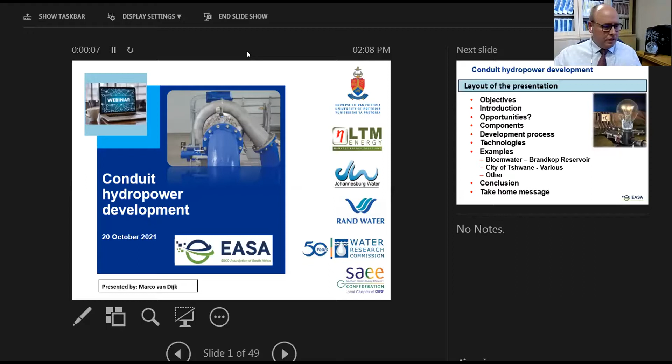So I'm going to share my screen. That one. I think I then need to just swap this around. So hopefully you can see the screen now in presentation mode. Is that right, Kulakani? Yes, we can. Oh, great stuff. Let me just move this camera, I think it should be over here somewhere.

So the title of today's presentation is on Conduit hydropower and the development of that, and we've got a number of panelists supporting this. I am based at the University of Pretoria as well as at LTM Energy, heading the hydropower section there.

So what I'll do is firstly give you a bit of an introduction of what we can expect in this presentation of mine. It's probably going to be about 30 to 40 minutes in length, and then there's some opportunities for questions, and obviously through the panelists as well. I'll first start off with the objectives of this specific topic, give you a bit of an introduction, some opportunities, just highlight those, then look at the different components.

That's where the theoretical academic component comes in. We'll look at the development process, the technologies that are out there that could be utilized, then touch on some examples - I've only selected a few. We now have many more that could be discussed, but that would be a day-long webinar, not just an hour and a half. And then some other examples as well. We'll end off with the conclusion and then a take-home message that I've got for you on this.

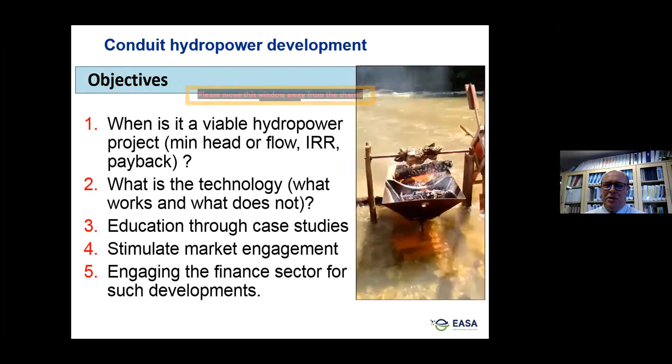Just a small video clip showing one way of utilizing the flow of water - this is a kinetic hydropower installation and its use. For these people, this is definitely a viable hydropower project - they're getting the meat cooked using the power of water.

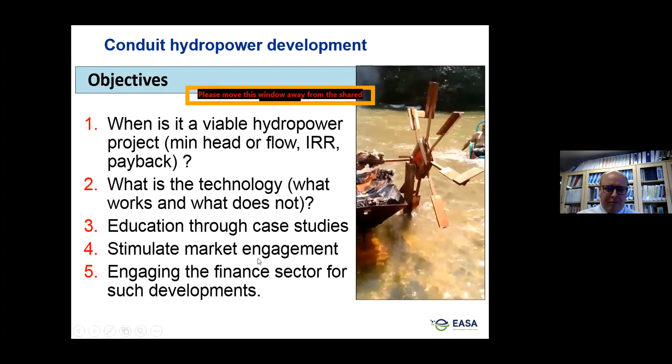In South Africa, we are the country with the second largest installed hydropower capacity in Africa, but we produce less than 5% of our total electricity from hydropower. We've got some large pump storage schemes, so that pushes up this hydropower capacity, but we actually don't generate a lot of our electricity from hydropower.

We don't have as many conventional hydropower opportunities as the rest of Africa, simply because we're a water scarce country. But we do transfer large quantities of water daily under pressurized or gravity conditions over large distances and elevations, done in canals, pipelines, tunnels, and so on. So there are opportunities at existing water infrastructure, and we call these the so-called unconventional opportunities.

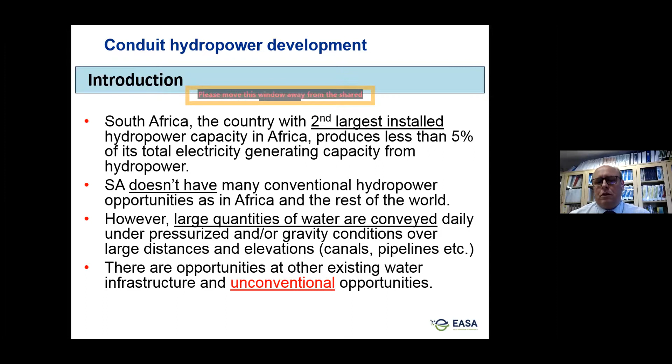To generate hydropower, we need head, flow, and then the third thing is we actually need a use for the generated electricity. Here's a video clip showing the typical installation that's required.

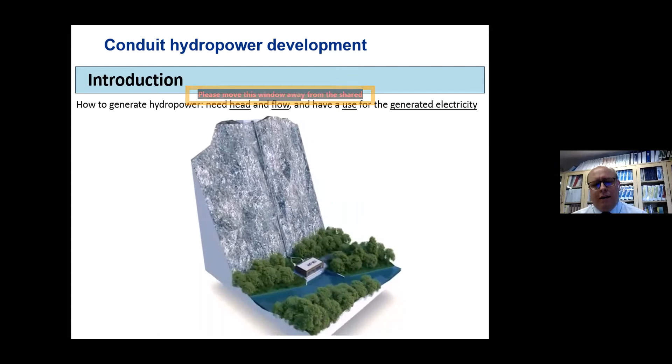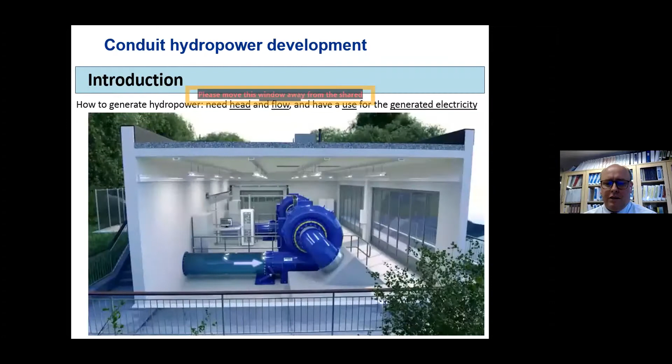It starts off with having an upper reservoir. From the upper reservoir, water is fed through a penstock down to a turbine room. Where it enters the turbine room, we open a valve, which allows the water to flow into a turbine. Once it flows into this turbine, we open the wicket gates, which controls the flow.

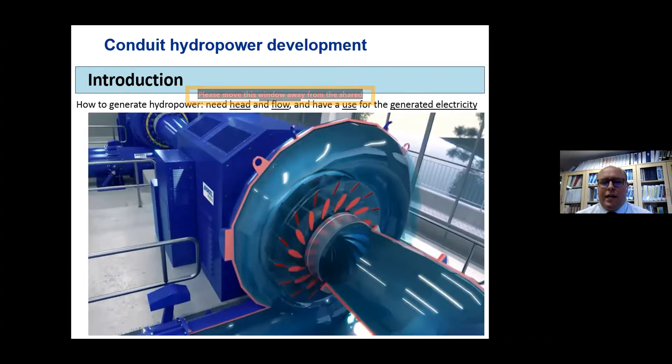The flow is guided onto a runner - it's called a runner in a turbine, not an impeller. That runner is connected to an axle. The axle turns a generator, and the generator converts the mechanical energy into electricity.

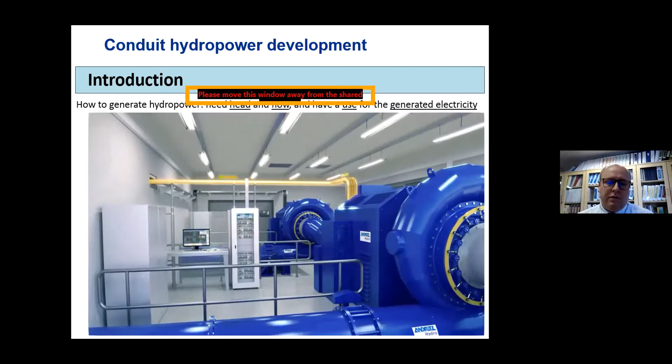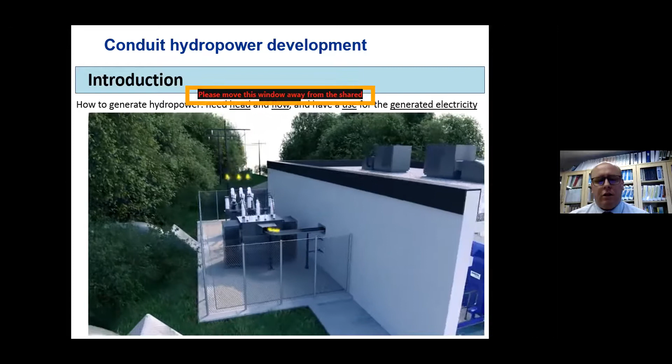That electricity goes through a control panel, and eventually is fed back into, or fed into the grid, or it's just used on site if there's an application for that. The water that has gone through the turbine is then fed through a so-called tail race into the downstream reservoir. So this is the basic principle of hydropower.

So you saw the head difference between the upper and the lower reservoir. You saw that there was flow between the upper and the lower reservoir, and then there's a need for electricity - it's taken somewhere, either on site for smaller installations, or it's fed into the grid.

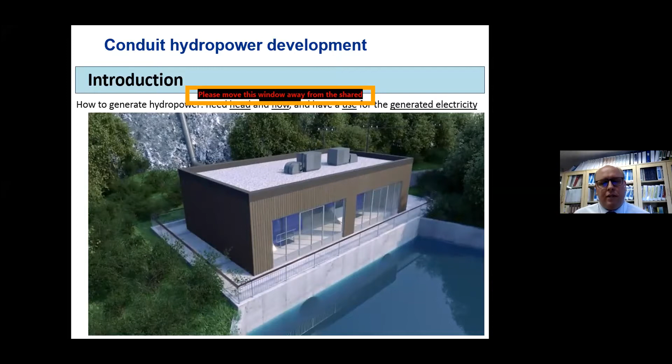So why hydropower? We all know about the electricity shortages we've got, and just last week we had some good examples of that again. We all know about the rising cost of electricity, which is making all of these renewables even more affordable. And the whole awareness and concerns we have with the environment creates a drive to the renewables and greener type of technologies.

We have a need to utilize all our available resources, and especially if it's a renewable resource that I'm sharing with you today, that actually proves that it can be a viable alternative in a number of cases.

The classification we've got for hydropower in South Africa is: pico when it's less than 20 kilowatts, micro if it's between 20 and 100 kilowatts, mini 100 kilowatt to 1,000 kilowatt, and small is 1 megawatt to 10 megawatt. After that it becomes large, so the ones at Gariep Dam and Vanderkloof Dam that Eskom has, and Mbashe, are classified as large.

So our focus here is on the whole spectrum from pico to small that could be evaluated for conduit hydropower.

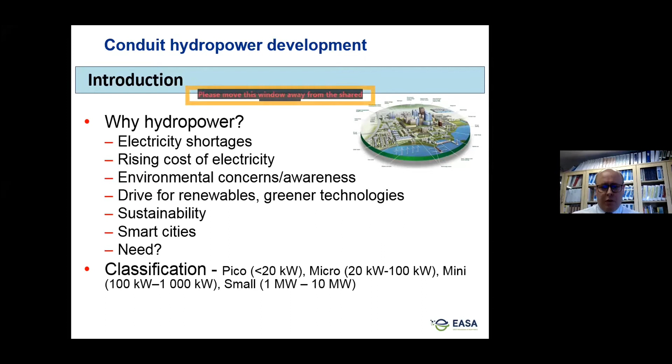So we see these as some low-hanging fruit. And why we see it as low-hanging fruit is some of that infrastructure is already there. You don't need to build a new dam or construct a new penstock. It's already there, and all you need to do is latch onto that and add this subsequent benefit that you can actually get from the system by adding on a turbine.

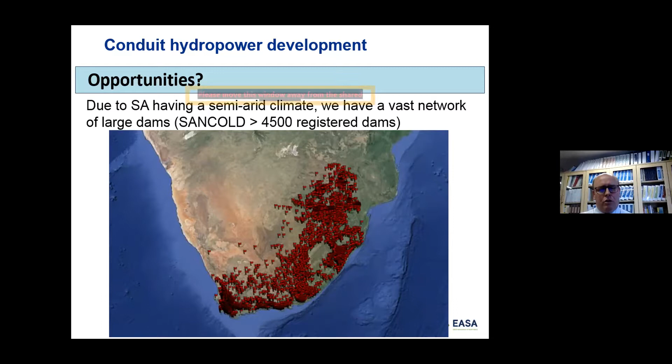Why not just have a turbine on that release? So we're not saying let all the water go from the Vaal Dam, we need it for obviously Gauteng. But if you have to release the water anyway for the downstream river system, why not just add your turbine to that? So that will be more the conventional one.

So we're focusing today on this presentation on the more unconventional ones. In South Africa, we've got numerous municipalities, district and local. We have the Department of Water and Sanitation, Eskom, irrigation schemes, mining, and all of these entities have opportunities to add a hydropower plant to some of their pipelines, to the wastewater treatment works, to the water treatment works. And it is just a case where one needs to find that location where you've got the head and the flow, and see whether or not you can add a turbine instead of dissipating some of that energy with a valve.

Why not just add a turbine to it and convert it to a renewable energy source? So just 3 examples in the city of Tshwane. There's many more examples in the city of Tshwane, but I just highlighted just 3 here, where we've got at 3 reservoirs, Heights, Garsfontein, and Klapperkop. We can generate...

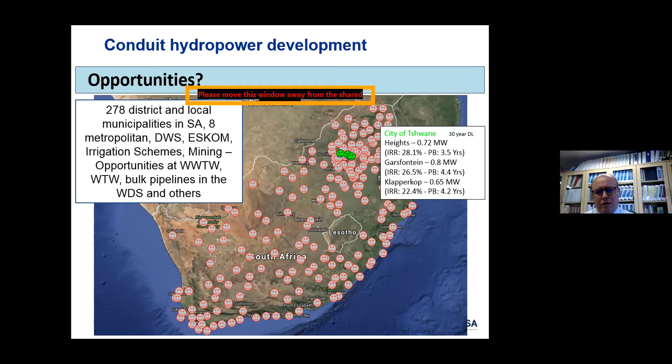Small micro installations, or mini installations sorry, with high internal rate of returns and quick payback periods, and the levelized cost of this electricity being probably less than half or probably a third of what the current levelized cost is of coal generated electricity. So it makes sense to develop these, and the city of Tshwane has gone and developed some of these, which I'll share with you.

So as I mentioned, what's needed, the components, is you need a head difference and you need flow. The head will depend on the pipe length and the diameter, and where's your intake, where's the outlet, where's the powerhouse. So this will be the picture you see there, of a more conventional one where you might have had a water wheel situated next to it and they utilize this height difference there. So in our pipe systems, we look a little bit differently at it. We don't have this open flow of water, we have it in a sort of confined, closed conduit. And that's why we refer to it as conduit hydropower.

So that's the one component, the head difference. The second component is the flow, and that could be variable as well, depending on - in most cases we look at it in the hydrology sense. Does it rain enough? What does the catchment look like? What is the storage? But in conduit hydropower, we don't look at the rainfall, it's not important for us. We're looking at what's flowing in the pipeline already. So there we look at demand patterns, we look more at the hydraulic side of things. What's the reservoir capacity? What's the system layout? And there's the formula, I'll get back to that now again: power equals rho G Q H, multiplied by the efficiency.

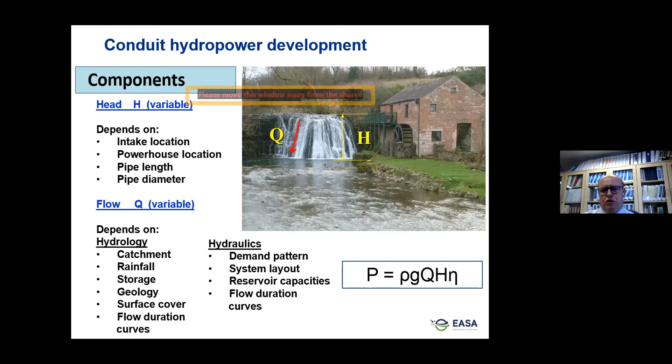So I'll show it in an example for you in a second or so. Conduit hydropower is similar to what I showed you in the video, where you have the upper reservoir and the lower reservoir. Conduit hydropower is from one storage reservoir to another storage reservoir. So these concrete structures you see in town, we have water flowing under gravity from reservoir number 1 to reservoir number 2. And the way we control flow in that pipe system is by choking it. We choke it through a so-called PRS, which is referred to as a pressure reducing station. And in that pressure reducing station, we have pressure reducing valves.

Every one of you also have a pressure reducing valve at your house. It's where the water goes into your geyser, and we have the same type of valve there where we choke the flow and control the pressure going into your geyser to only be 4 bar, or 400 kPa, or 40 meters of pressure. The same then happens in our water distribution bulk water supply lines, where we have to control that water going into the end reservoir and control the flow.

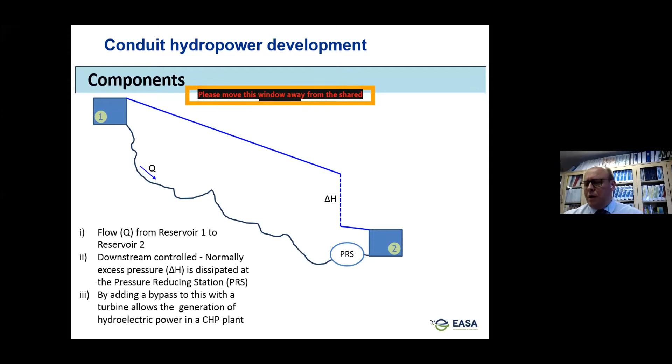So this pressure reducing valve basically chokes the flow, and it's a mechanical device. But why would you want to throw away this pressure in the system if you could rather add a turbine and force that water to go through it? If it goes to the turbine, it will start turning the runner. The runner turns the axle and starts generating electricity through the generator. You get rid of that same amount of pressure you wanted to get rid of, but now you force it through the turbine.

So it's a very nice retrofit to existing systems where we have the pipeline and the pressure reducing station, and we now have the turbine in parallel to that. You would rather force the water to go through the turbine instead of the valves. You would always still need the valves, because there might be a case where you want to service the turbine and still need to supply water. Remember, this is a subsequent benefit we're getting from the pipeline, and the main function is still to supply water.

Very importantly, this operates 24 hours a day, 7 days a week, or 360 days a year. I say 360 because you might have a few days of maintenance on the pipeline where you're not going to be able to supply. What I'd like to highlight is that you have a very continuous base load of electricity that can be generated here, not just in daylight hours or when the wind is blowing. We have a very constant, very predictable type of electricity generation that we can get from this.

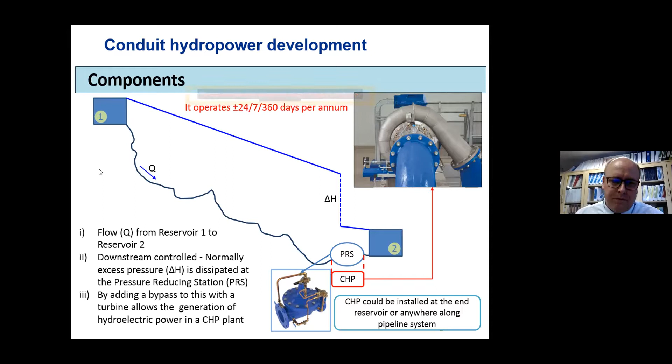So the development process would be: identify the site, that's the first step. Determine the generation potential based on the flow and head available. Consider site layouts and configurations that could work on that specific site. Consider the turbine options, and I'll show you some turbine options that can be considered. Then there's the application, or what you're going to do with the electricity. Are you going to put it back into the grid, utilize it on site, or use it as a mini grid standalone type of application?

And then we also look at the economics of this. So there's a process, a scope of work you go through to eventually develop a site. But the most important three elements are flow, head, and a use for the electricity. The rest is just technical information on how you're going to do it, but you need those different elements.

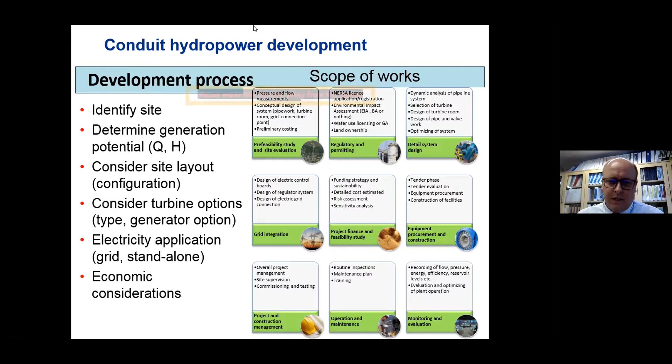So, back to the formula. The formula says rho G Q H, multiplied by the efficiency. A very simple formula, very similar to a pump, but in a pump it's the electricity needed to drive it, so you divide by efficiency. Here we multiply by efficiency. The density of the fluid, in most cases water, is 1,000. Gravitational acceleration is pretty fixed in South Africa at 9.81, so you can use that. The flow would be in cubic meters per second.

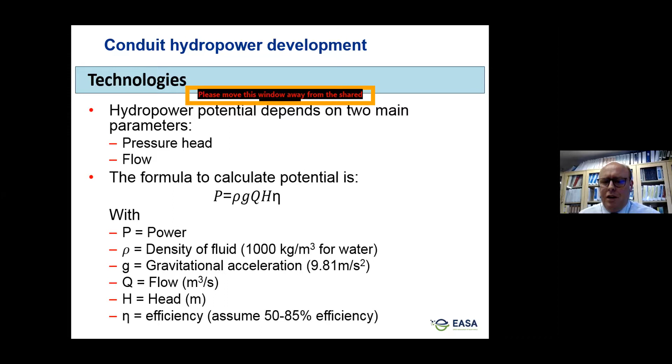So if I have 200 liters, for instance, that will be 0.2. The head would be the head that you could actually dissipate, in meters. Then the efficiency varies between 50 and 85%, depending on the type of turbine used and the application. For smaller installations we probably drop down to 60%, but for larger, more mini to small installations, we get close to 85, 87%. The turbine itself is almost 90% efficient, but taking into account the generator as well, we probably drop down to about 85, 86% efficiency for a properly installed or designed turbine.

So how do you go about determining what power you can generate from it? Well, you can just take one of the selection graphs from a turbine manufacturer, take the head on the left-hand side, and the flow rate on the bottom axis.

In this case, it was 100 meters of head and 200 liters a second of flow. If you go up to where it intersects, you can read off that it's about 150 kilowatts.

If you do the hand calculation: 1,000 times 9.81 times 0.2 times 100, times the efficiency of this type of installation, let's assume 0.75 or 75% efficient, that gives 147,000 watts. So that's 147 kilowatts that can be generated using these parameters of 100 meters of pressure head and 0.2 cubic meters a second of flow.

As you can see, it's a direct relationship. The power is directly proportional to the flow and directly proportional to the pressure head. However, it's a lot better to have pressure head than flow. If you have a lot of flow, it means everything becomes a lot more bulky.

You have to have bigger valves and bigger pipes, whereas with pressure head, you just have to make them a little bit stronger. So I would love to install installations in the Alps or in the Drakensberg, where I've got lots of pressure head. But flow is also directly proportional to power, it just means your installation becomes a little bit bigger.

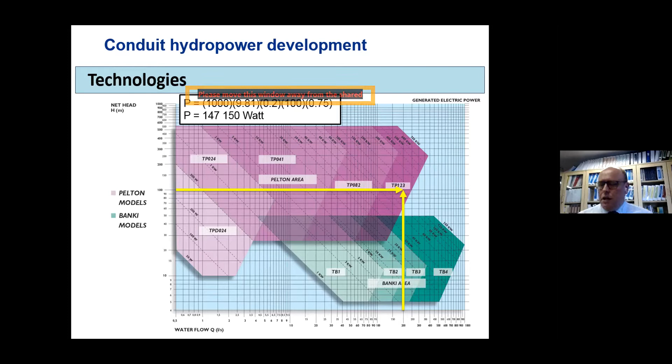So onto the technologies. Just to highlight, there is no proprietary technology here. The technology we're going to use has been in existence for hundreds of years. We apply it in a slightly different way now in the conduit hydropower environment, but it's not a special type of turbine. Yes, newer technologies are coming out, and I'll show you some examples of that, but you don't have to rely on a technology that's only supplied by one supplier.

So the grouping of turbines we get is basically grouped into two: the reaction turbine and the impulse turbine. And the application is very important.

If you see the picture on the bottom left, the orange would be the location of the turbine. The pipeline comes in from the left, goes through the turbine. You'll have pressure on the left-hand side that you'd like to dissipate, but on the right-hand side, you still have water and pressure in the pipeline. So that's pressure on both sides of the turbine.

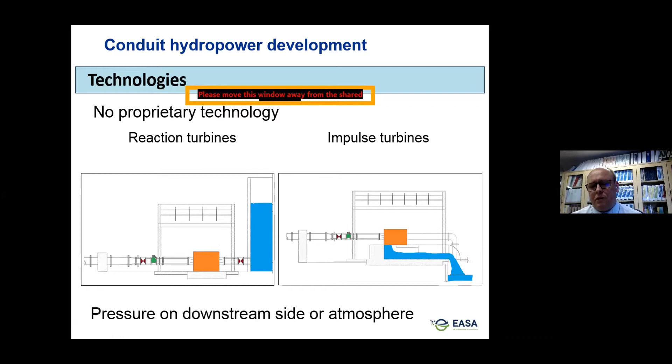The impulse turbine is water coming in from the left, going through the turbine, and then it's released to atmosphere. So there's no pressure on the downstream side, and it can't be submerged downstream—it's open to atmosphere. I'll show you some video clips of exactly what that looks like and how it operates.

So, reaction turbines have pressure on the upstream and downstream side, while impulse turbines have pressure on the upstream side but atmospheric conditions on the downstream side. That immediately highlights the typical application for each.

If I have a pipeline underground coming in that feeds into a reservoir, and the reservoir level is above ground level, that means there's pressure on the downstream side, so I need a reaction type turbine. If, however, I have a pipeline that goes up the side of the reservoir to the top and discharges into the top of the reservoir, then I could go for an impulse type turbine, because it discharges to atmospheric conditions at the top of the reservoir. So it's just horses for courses, whatever would work.

Linked to that is the pressure range—when I show the different turbines, I'll talk about their different pressure ranges. It's important: with reaction turbines we have pressure on the downstream side, whereas with impulse turbines it's open to atmosphere.

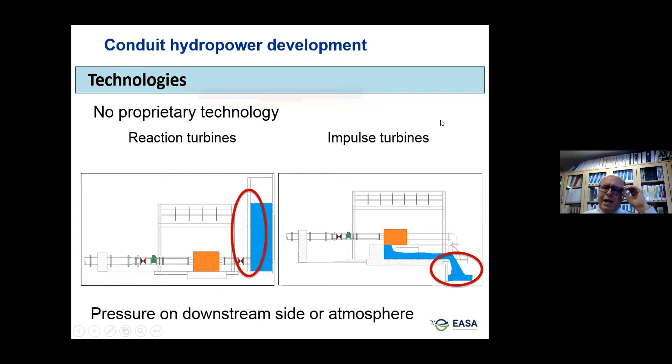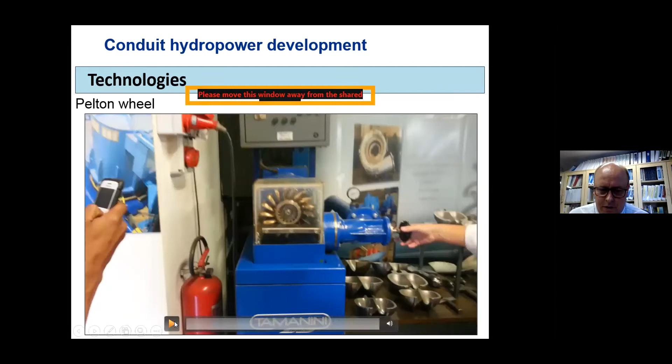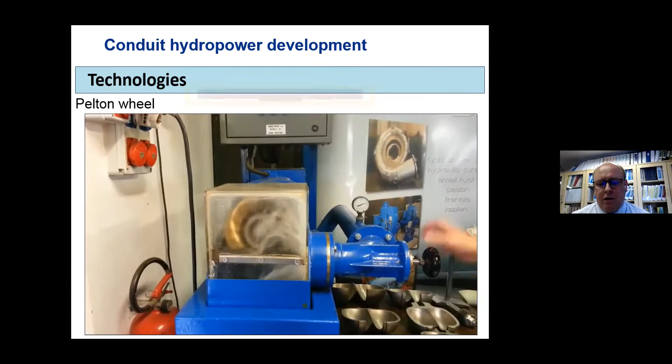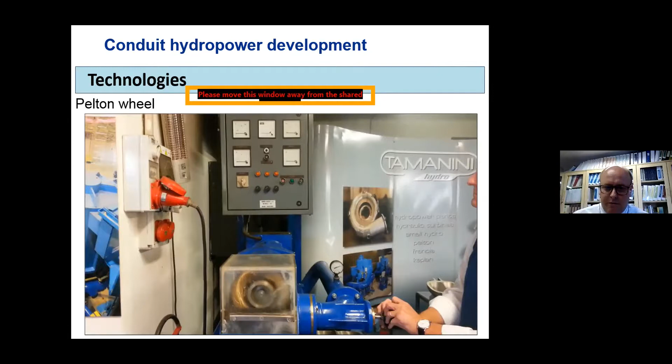So the valve is opened and that starts forcing water onto the buckets at a high velocity, which then turns the runner. As you can see, once it's hit those buckets, it just falls into the downstream volute, and there's no pressure that you see in this little video. That's a Pelton, so this will be classified as an impulse type turbine.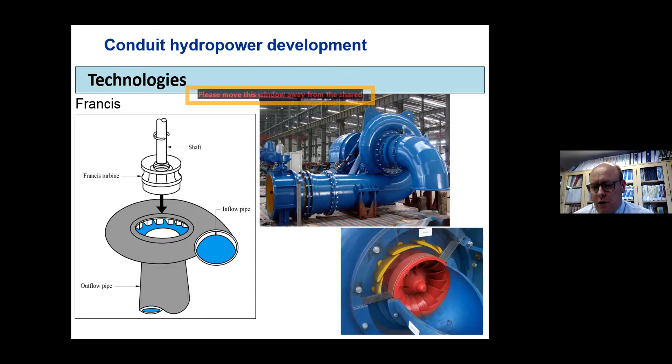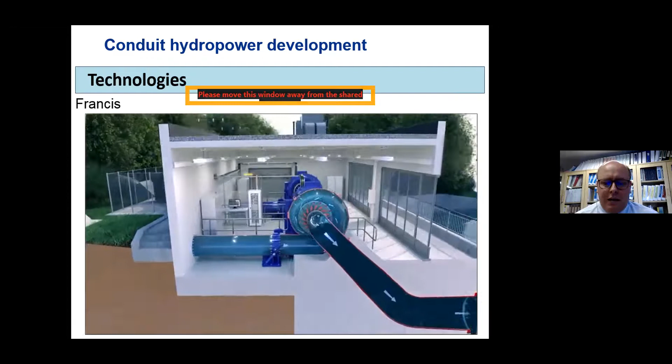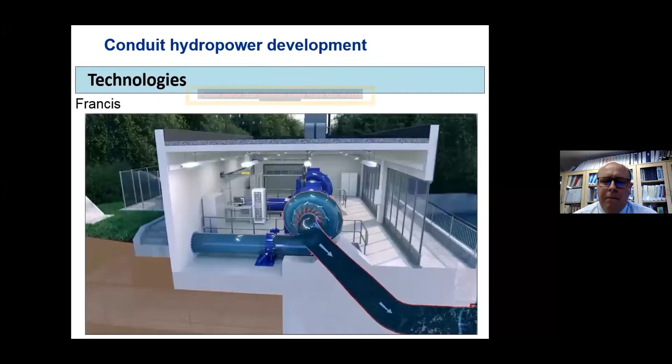Another example would be a cross-flow turbine. This is again an impulse turbine. If you look at this picture, water comes in from the left, goes through this drum-like runner, and is then released to atmospheric conditions. We've installed a few of these in South Africa now.

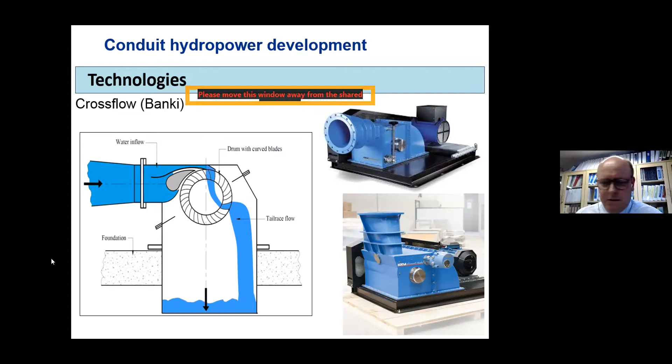For impulse turbines, the Pelton is more for higher head applications, with a lot of them installed in high head areas. Francis turbines can also handle high head, but they're more medium to high head. These cross-flow turbines, or Banki turbines as they're also called, would be more medium head, maybe 20 to 50 or 60 meters of head for these types of installations.

Another technology which is very common would be the Kaplan type turbine, which is essentially a propeller that you have in the water. This bottom picture on the schematic shows the typical S bend you get, where water comes in from the penstock and turns the Kaplan propeller, with a shaft going through the pipe wall and then onto the generator, and the water is released downstream. It's a very common type of installation for low head installations.

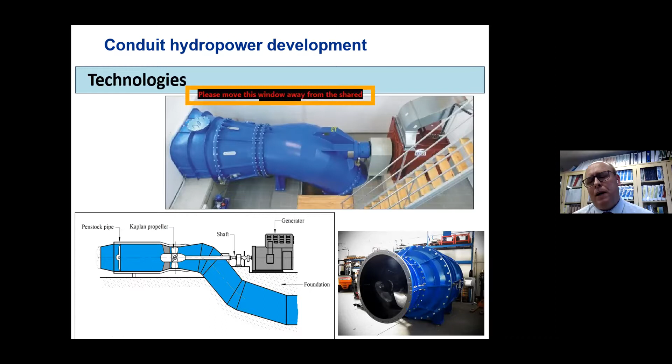So maybe up to 30 or so meters of head, with huge volumes for low head type installations, whereas the Pelton would be lower flow rates but much higher heads. Then you get some newer technologies being introduced. A turbinator is a type of Kaplan turbine that's connected to the dam but discharging to atmosphere to a certain extent. You also get a siphon type turbine, and hydro engine is a new type of Pelton, but with sort of horizontal buckets.

The hydrodynamic screw in the bottom right corner would be like an Archimedes screw. For low head installations, like at waste works, the hydrodynamic screw is sort of the inverse of the Archimedes screw. So the Archimedes screw is for pumping water up, while the hydrodynamic screw is for releasing water and generating electricity from that.

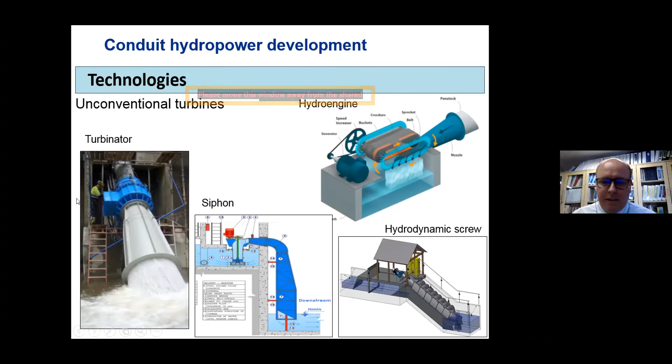Some other unconventional ones would be from a company called Lucid Energy. I don't believe they exist anymore, but a few years ago they came up with the design of a spherical type turbine for large diameter pipelines. It was not a very efficient type of turbine, probably close to 50%, but it did allow for installation anywhere along the pipeline.

Probably not as unconventional, but used quite often, would be pumps as turbines. This is where you use a pump and just use it in the wrong way. You turn it around so the flow goes into the outlet and out of the inlet, so you just swap it around.

The impeller may need to be changed for this, but there are advantages: pumps as turbines, or the pumps themselves, are a lot more common and modular, so it might be easier and off the shelf to obtain. But a negative, unfortunately, is that they are not as efficient.

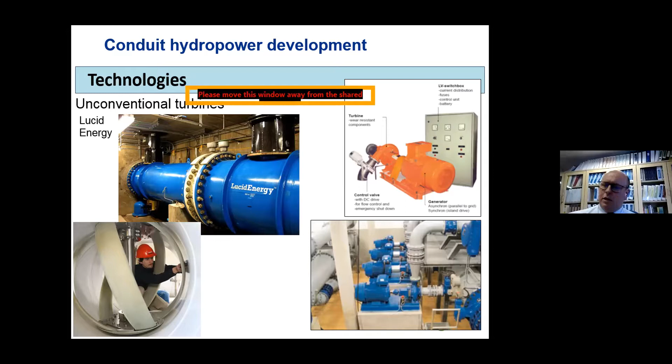As I'll show with the cost estimates, although you might have a saving on installing a pump as a turbine, called a PAT, in the long run this might not be the best solution. As the capital pays off quite quickly on the project, having higher efficiency for the next 15 years is a lot better than a cheaper initial capital layout. But it is used as a way of generating electricity as well.

Unfortunately, you cannot change the flow going through the turbine very quickly. If somebody then switches a light off or on, that means there's going to be a demand change on the system, and your turbine is still generating the amount of power that whatever the flow and pressure dictate.

So what we usually would have is some regulating system that regulates the resistance and creates a constant load. Whatever I'm generating, whatever is being used by the users, whatever is left, I'm then dissipating that electricity. You can do that with water regulators, a heating element, water dissipation, or just air dissipation for even smaller installations. But you can't just generate electricity and not use it, so you have to get rid of that, otherwise you're going to burn out the generator.

Another option would be if you're grid connected. You have a turbine, the control panel, and then you feed it back into the grid. You could also feed users, but in this case you are synchronizing your turbine to the grid. In the first installation you have to balance that by adding the regulating system, where you don't have that need when you have a grid-tied type of system.

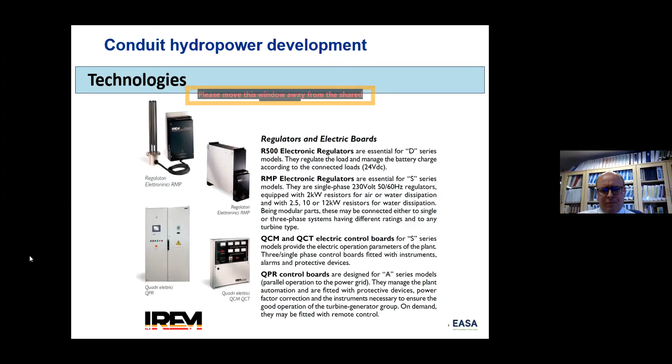Approximately 70% of Bloemfontein's water actually comes via this pipeline. One of the critical things was to make sure that whatever we do on the system, we do not damage the pipeline. I don't want the turbine to suddenly shut down and then get a pipe burst. The main function is to supply water; we are just taking a subsequent benefit by generating electricity.

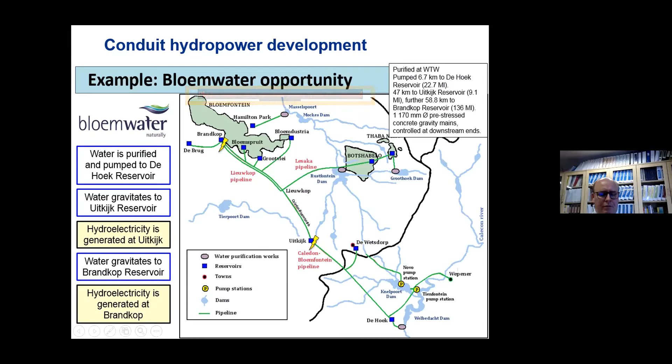This pipeline actually has a number of opportunities. We can generate electricity at Uitkyk, and then it gravitates further until it gets to Brandkop Reservoir, where we can generate some more electricity. At each of these two installations we probably have between 350 and 400 kilowatts we can generate, but we did this project a few years ago as part of funding obtained from the Water Research Commission, and we only installed a smaller installation initially as a pilot, although they're using it at the moment.

The flow is about 1.1 cubic meters a second. We're only taking about 30% of that, sitting at about 350 liters a second through our offtake, which then goes to the turbine inside this turbine room. After it's generated the electricity, we dump all of this water into the corner of the reservoir.

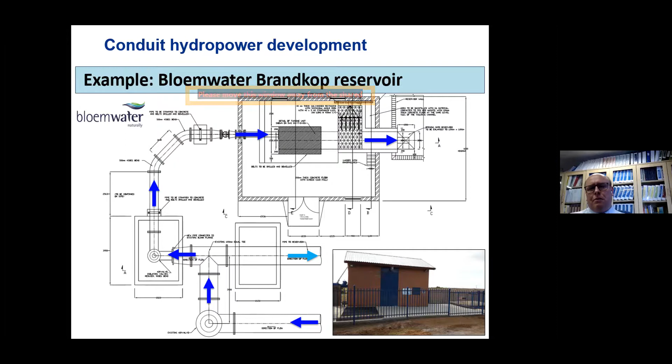So we haven't consumed any water. Instead of dissipating it through a number of pressure reducing valves, we are just doing that now through a turbine. And I'll show you a picture of that now.

Cost-wise, we were probably at about 3.5 million rand, with the biggest portion being, in this case, the electrical connection in the Bloem Water office, but also the turbine we imported from Italy. In this case, it was an IREM cross-flow type turbine. And those were the biggest two cost components.

The turbine room itself was about 500,000 rand. I'll show you an example where in another installation we actually don't need a turbine room. So just to put it in perspective, the biggest cost component would probably be the turbine.

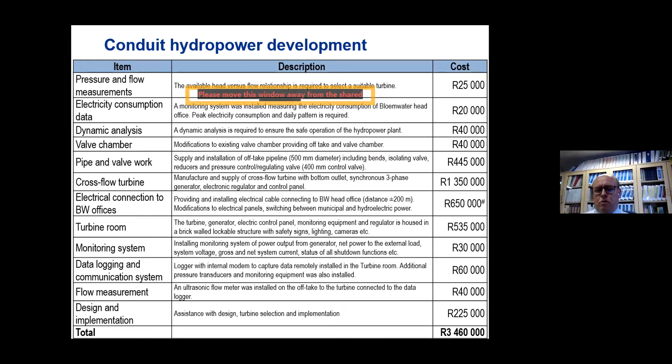So this installation was opened in 2015, and this is a standalone installation. It's not connected to the grid. The maximum power we generate there is 96 kilowatts. It utilizes about 350 liters a second, which is about a third of the flow to this reservoir. And there's the 40 meters of head available to do this with.

It was launched in 2015, and this plant is not feeding into the grid. It feeds the Bloem Water head office. So it's the first building in the country that runs off hydropower, or can run solely off hydropower.

And it should pay off in about 6 years. The reason this is quite a long payback period is because we've installed this large installation, 100 kilowatts, but we do not utilize it to its fullest. In the evenings, when at 4:30 people go home, the demand drops to only about 25 kilowatts.

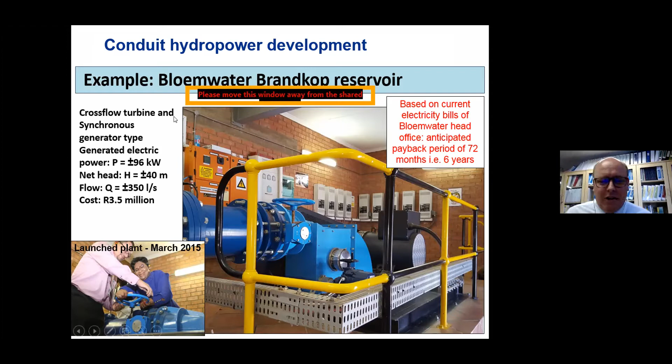But still, it is paying for itself. They're saving on electricity, and this was now a few years ago already. We obviously based this on certain assumptions of how electricity prices would increase over the next few years, and this has been shown to differ from our assumptions, with suddenly last year having this 15% increase again, which makes all of these installations even better for us.

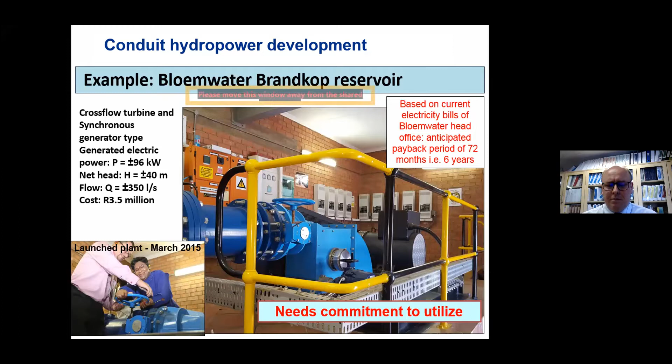This is a learning exercise for all of us, and a very important element is that it needs commitment to utilize this facility to make it work. Initially, it wasn't operated as often as I would have liked to see it operated. But once it became part of the key performance indicators, the KPIs of the board members or managers at Bloem Water, that started to change the picture. Then there's a commitment to making sure the plant actually runs, because we're saving 60,000 rand a month on electricity, for instance. That's the commitment needed to make this a success.

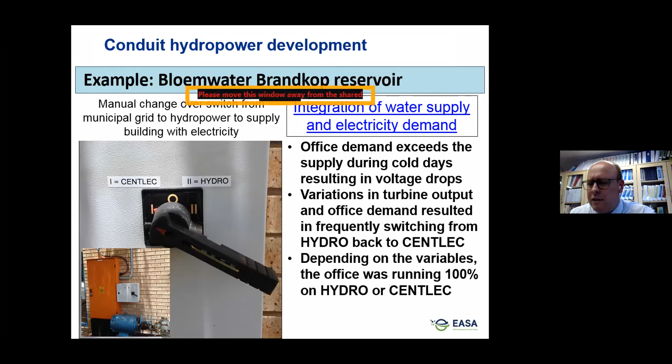Initially it was a manual process switching between Centlec, the electricity supplier, and hydro. But there were times when electricity demand in the building, especially in winter, exceeded what we thought it would, going beyond the 96 kilowatts we could generate, resulting in voltage drops. So we had to make new plans, which increased the cost of the control panels for this installation.

We then created automatic changeover panels. Inside the Bloem Water head office, we looked at the distribution and all the panels in the building, and whenever demand exceeds what can be supplied from the hydro, we switch back some areas of the building to Centlec. We supply hydro all the time, but as soon as demand outstrips supply, we don't switch the whole building back to Centlec, only certain parts or areas, which means we still maximize our utilization of the hydropower.

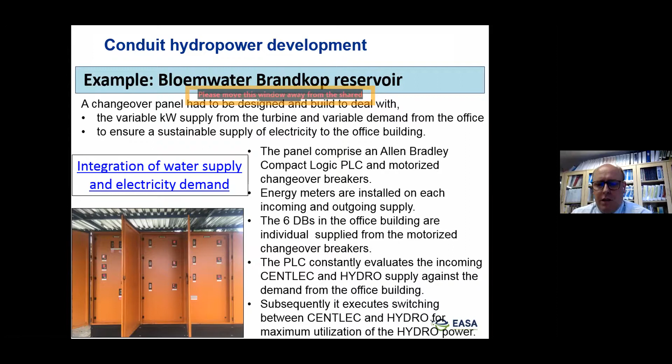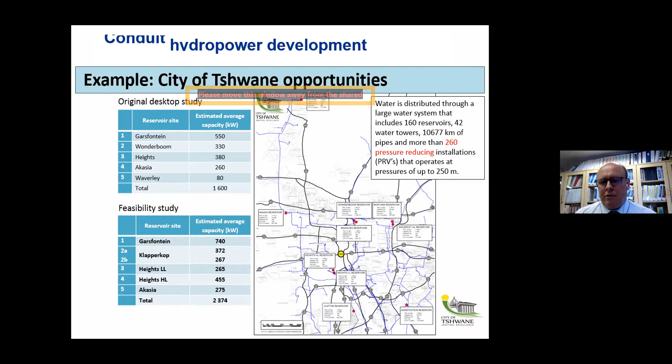More examples: City of Tshwane. Initially we did a desktop study looking at some sites and saw there was 1.6 megawatts available. Going into more detail, recording flow and pressure, we realized there was more potential than our initial assumptions, so we went up to 2.4 megawatts, and now it's even a little higher with more data. That was just for a few of the sites.

In the City of Tshwane, we have 260 pressure reducing installations, so that means there are potentially that many sites to look at. Not all sites will necessarily be viable - some might be too far from the grid, or the flows too little to generate. I'll get to that in a few slides.

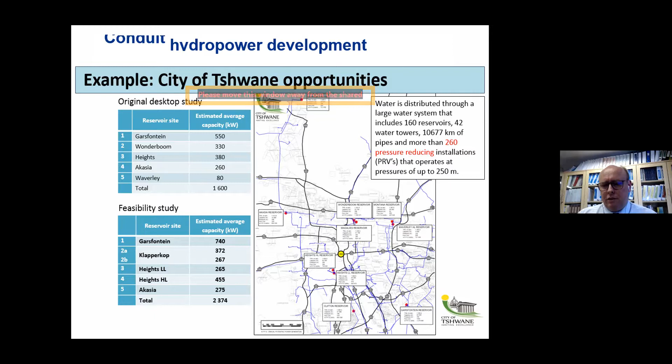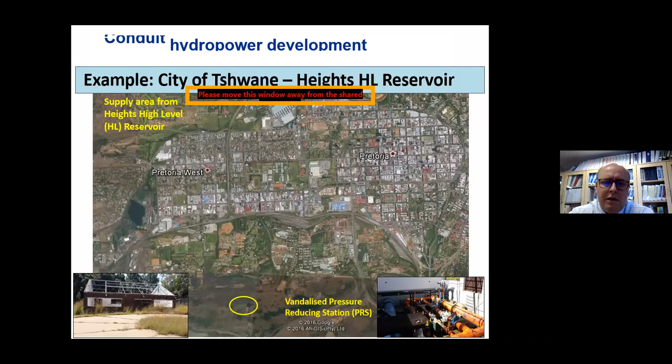Another example is the installation now planned at Heights High Level Reservoir. Here's a Google image of the CBD of Pretoria, where I've drawn the yellow circle - that's the Heights High Level Reservoir, an important strategic reservoir supplying a key area of the city. Unfortunately, this pressure reducing station was vandalized. Although there were guards at the site, eventually the roof was removed, the windows were removed, and the spindles of the valves were cut off, so it needed to be repaired.

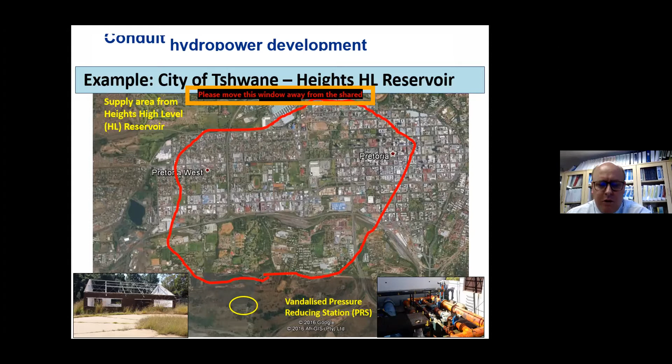During the process of deciding what to do, it was decided to build a new pressure reducing station a bit further down the mountain towards Exaro's side in Valhalla. It's a concrete structure, so no more tin roofs - a concrete, impenetrable structure to prevent vandalism to a certain extent.

When we started looking at this pressure reducing station, we decided to already include the option and space to add turbines at a later stage. Within the next few months, the station will be completed with all the pressure reducing valves for the bulk supply to these reservoirs. Later, we'll add two turbines, one 265 kilowatt and the other 455 kilowatt, at minimal extra cost just by making the chamber slightly bigger, which now affords us the opportunity to add these turbines to the installation.

You always need those pressure reducing valves, as I mentioned before. If you need to do maintenance on the turbines, then you need to switch back to the pressure reducing valves. Otherwise, you're not going to be able to supply water.

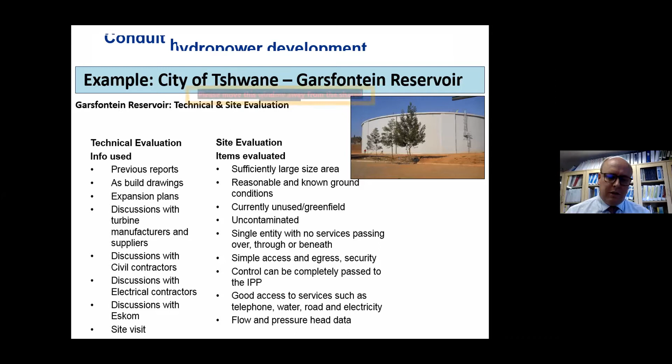Another example is Garsfontein Reservoir, where you go through the whole technical evaluation. You look at all the information available, do the site evaluation, see if there's enough space, what would be the easiest way to access the site, how would you connect into it, where's the closest substation you can connect to, are you going to use the electricity on site, is there flow and pressure data available, and you come up with some design.

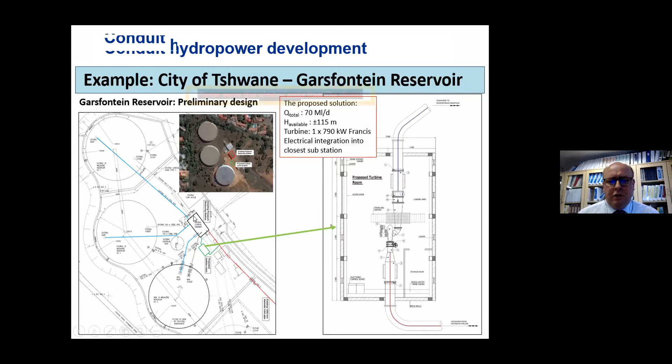The idea is that one could simply, with the red line coming in here from the bottom corner, have it go into this pressure reducing station, and then from there it feeds into the 3 reservoirs.

Just upstream of that pressure reducing station, we could build a small turbine room, 5 by 7 meters, and inside that room we take the inflow and put it through the turbine, then feed into the downstream side of the pressure reducing valves, which feeds directly into the reservoirs. So it's not a lot of civil works - it's a small building, a bit of pipe work, and the turbine.

In this way, you could utilize the pressure we have there, which is about 115 meters that we can dissipate, and we have about 70 megaliters a day that's supplied. It supplies constantly, 24 hours a day, 365 days a year - we actually have the supply to this area and to these reservoirs.

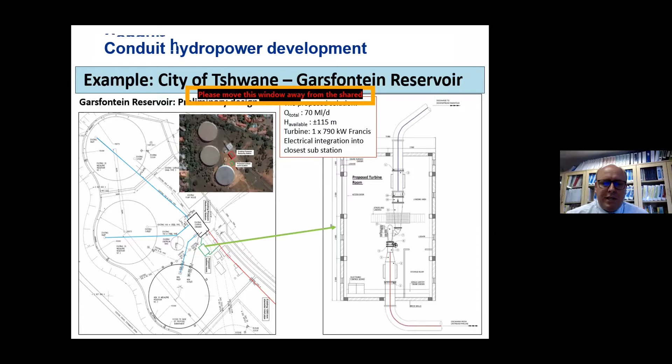Yes, there is some variation between winter and summer, but that's not significant in these bulk reservoirs. It's also good to have a nice constant steady supply to meet demand in terms of water supply, and that also provides the opportunity to generate nicely almost 0.8 of a megawatt.

Looking at the cost of an installation like this - the financial information shows it will probably take 2 years to implement, from starting to design it to building it. The capex cost we calculated by getting quotations, and we looked at what the O&M cost would be.

We looked at what the escalation would be during construction, and incorporated all the different cost components. It came to about 40 million rand for this project.

That would result in an internal rate of return of about 26%, a payback period of about 4.4 years, and the levelized cost of energy over the design life would only be about 31 cents. This shows that it's definitely a viable scheme.

So yes, there's a high initial capital outlay, capex, that you need to build this, and as I mentioned, the turbine is a very expensive cost component. But because you are generating 24 hours a day, 365 days a year, it results in very high IRRs and the levelized cost of energy becoming low.

We've also played around with sensitivity analysis on exchange rates and whether or not you do wheeling agreements. We looked at different scenarios and options, where we escalate the energy cost by only 8%.

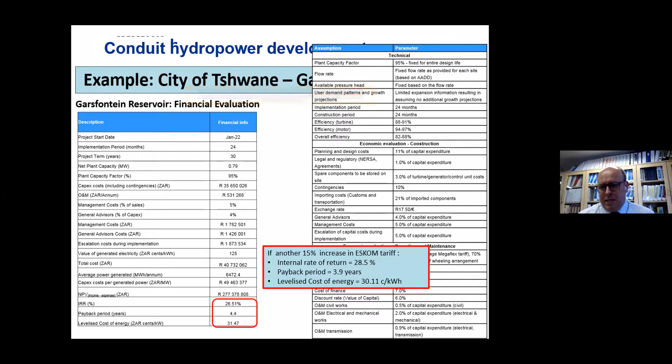Whereas if we get, for instance, another 15% increase, the internal rate of return actually goes up to 28.5%. Your payback period becomes even less, and the levelized cost of energy becomes less, because you are now increasing above what we assumed here.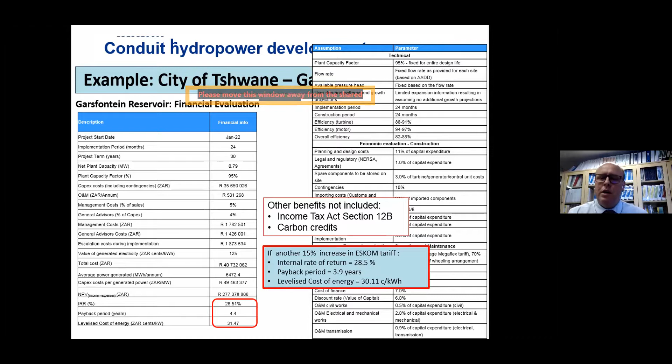There are still other benefits which we didn't include, like the Income Tax Act Section 12B and carbon credits. So there's still other ways of getting other benefits from this installation as well. We purely looked at what it would cost to build this and how long it would take to pay for itself - the other benefits are still benefits for you.

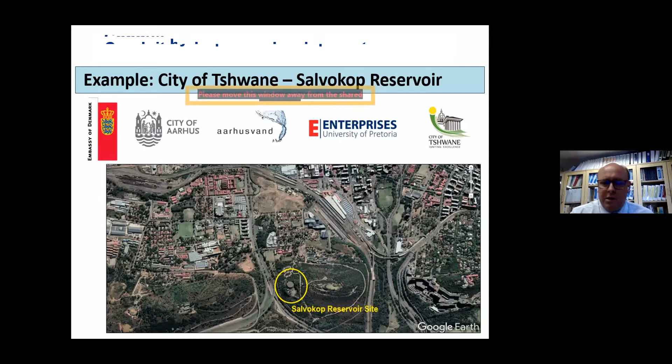An example here in City of Tshwane, Salvokop, where water is supplied from Klapperkop Reservoir to Salvokop Reservoir. We did some work with the Danish Embassy and the City of Aarhus, who have a mutually beneficial relationship with the City of Tshwane, and analyzed this. This is a picture inside a pressure reducing valve, inside the Salvokop Reservoir pressure reducing valve station.

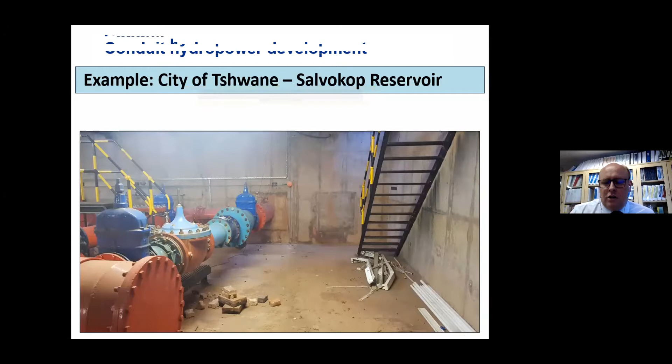Where the stairs are, there is actually enough space for us to put the turbine in. So in this case, it becomes a lucrative installation, because I do not have to build a new turbine room. I can just use the existing space inside this pressure reducing valve chamber and add my turbines. So in this case, we can add a 152 kilowatt Francis type turbine, a pipework turbine, and connect it to the grid.

The advantage of doing it in these municipal areas is, for instance, the City of Tshwane can add this generating capability into their own grid. So we're not connecting to the Eskom grid, we're feeding it into the City of Tshwane's own grid over here.

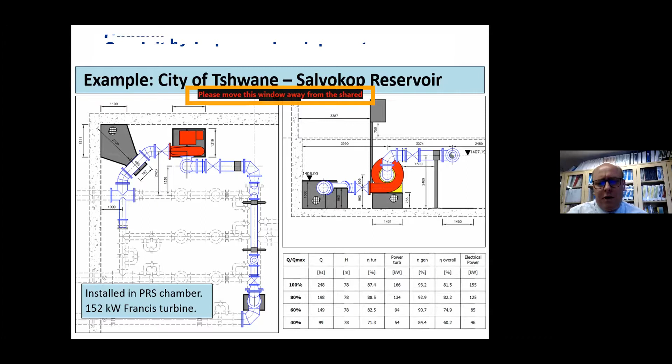But if you start adding the generator to it, the overall efficiency is reduced. So we're probably sitting with about 81-82% efficiency for a smallish installation like this. As soon as I go up to half a megawatt or a megawatt, I'll probably get it close to 85-86% efficiency.

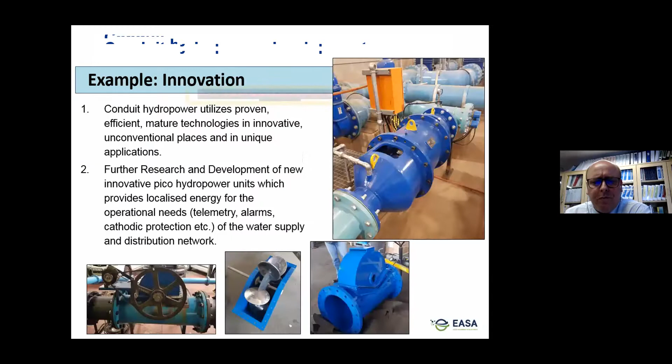We're not just looking at existing technologies. We are also looking at developing newer technologies - horses for courses - some smaller Pico type installations. The picture on the right-hand side is a collaboration we did with WD Power, a turbine manufacturer in South Africa and operator of some turbine facilities, where this is called the Otter turbine, and water basically goes straight through the blue pipe you see there with the generator on the outside of it. This is only a 9 kilowatt installation, installed in Doornkloof Reservoir in the City of Tshwane.

The idea behind this was to generate electricity for the telemetry system, the cathodic protection of the pipeline, the alarm system, the lights, and the guardhouse. So it's all used on site. You can have a small installation, bypass around the pressure reducing valves. This is a large chamber, so there was enough space in there, and all we do is generate electricity for a specific need on site.

The bottom picture shows some other types. We call them inline pressure wheels, a bit more of a robust type of installation, where we have this sort of wheel, similar to a pelton, but now it's a pressurized type of environment, so that you latch and attach to the top of the pipeline, with this wheel then sticking into the flow velocity of the water. That turns a pulley through the axle, and we connected this to a conventional alternator, typically that you find in a car or a truck, and we have the pulley just to increase the velocity, or the speed, for the alternator.

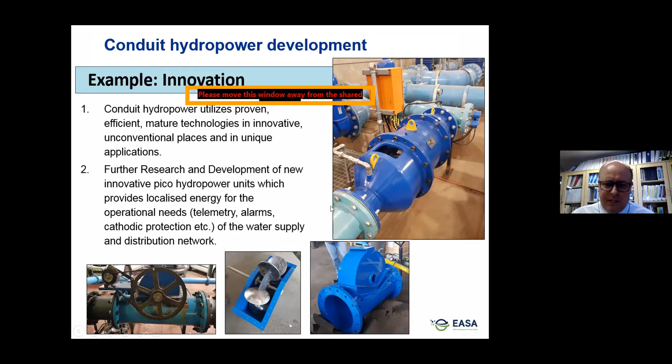And again, you don't generate electricity to put it back into the grid. We generate electricity and put it back into the treatment facility itself. So it's after the meter. So again, the City of Tshwane will just purchase less electricity from this. But it also allows you for some hybrid opportunities where you can have solar and wind and a turbine on a specific site, especially if you have space available like you might have at some of the treatment facilities.

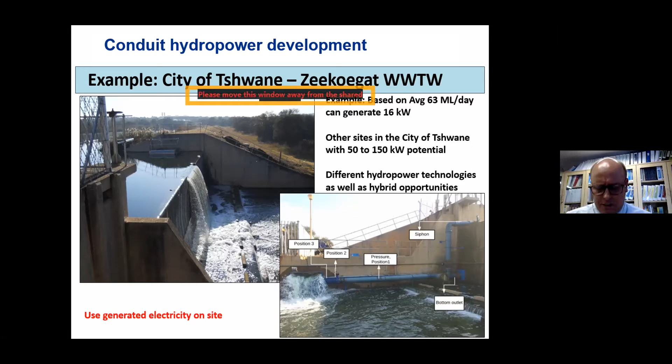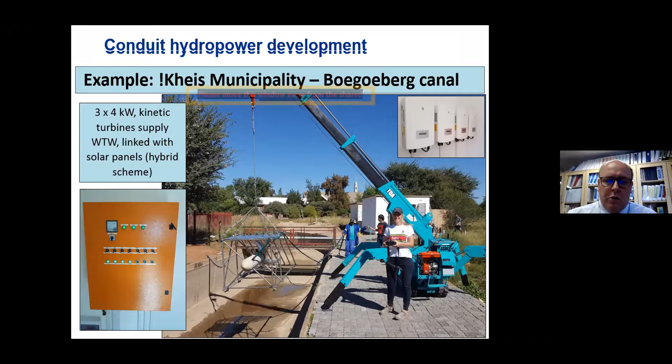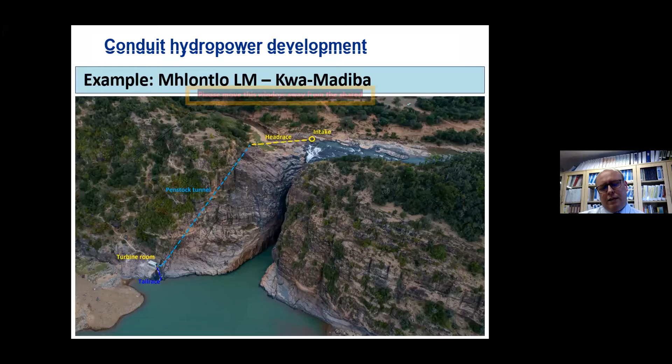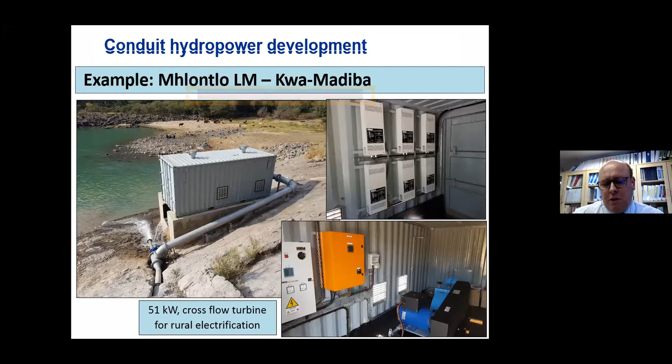But this was more of a conventional type. In this case, we again went for a crossflow type turbine based on the head, and we went the route of a modular approach where we installed this inside a container. This way you can have a nice controlled environment where you build your whole turbine, fit it and install it, and then you just take the container to the site and connect it up with the pipe work. So just a different approach we took. This was only a 51 kilowatt installation.

In conclusion, we've done a number of WRC projects and other consultancy projects where we looked at hydropower in general, but also in a lot of cases more specifically conduit hydropower. There are a number of Water Research Commission reports available, guidelines on how to go about doing this. We've done a number of scoping studies, and a number of research projects through the Department of Science and Innovation. The purpose of all of these studies was to highlight and show what can be done.

The City of Tshwane has now taken this step forward by already starting to implement a number of these. They've even gone so far as to take a mayoral committee decision or resolution that says whenever you design a new reservoir in the City of Tshwane, you have to look at maybe incorporating the opportunity to add hydropower to that. It doesn't mean you always have to do it, it just says at least consider it, look at it.

The Department of Water and Sanitation gazetted a document on sustainable hydropower generation, a policy document, a few years ago now. Unfortunately it hasn't progressed since then, where the opportunity to add hydropower to dams and their outlets is being considered. As part of some of the research projects we've done, we included in the general authorization process that if you have a small installation up to 300 kilowatts, a run-of-river scheme, a dam, or a weir, you do not have to go through a full water use license application process. You can just have a general authorization, which is a lot easier and simpler, basically a risk assessment and informing the department of your installation. You don't have to get the permissions you need with a water use license application, which can be cumbersome and quite expensive as well.

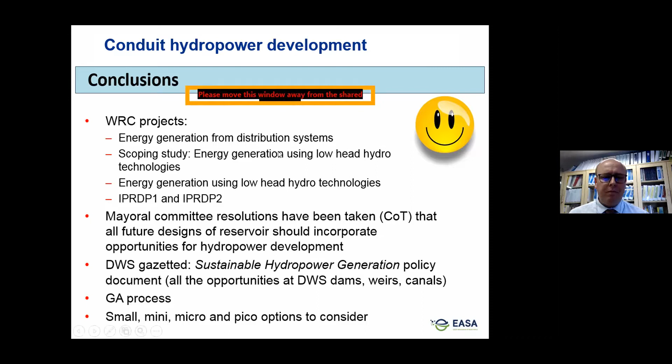So there are many small, mini, micro, pico options that can be considered. As my last slide, my take-home message is that I believe there are numerous hydropower opportunities in South Africa, especially utilizing existing infrastructure. The reason we like to focus on those is because a lot of the capital has already been spent. You have this infrastructure, so just try to latch onto that, piggyback onto that, and add the turbine. As an example, the eThekwini municipality has more than 2,000 pressure-reducing valves, so in my mind, immediately I see 2,000 potential locations to install a turbine.

You can even install it at your house, but you'll probably just generate enough electricity for charging a cell phone because you don't use as much water at your house. If you use it continuously, you'll be able to generate more, but then obviously you would use all of that water.

So there are a number of hydropower plants which are considered low-hanging fruit, easy installations, quick installations. We know of a project in Eskom that can generate 10 megawatts, and it will pay off in 2.5 years. So there are opportunities out there that just need to be developed. We can do these installations without special subsidies. As I indicated, we didn't even include carbon credits or some of the other benefits, and we can still show that it's a viable installation.

Going into a type of hybrid installation also makes sense. If you have an installation but need to upgrade the transmission line to tie into the grid, if you spend money doing that, why not also add a solar system as well? That way you can make it even more worthwhile to develop.

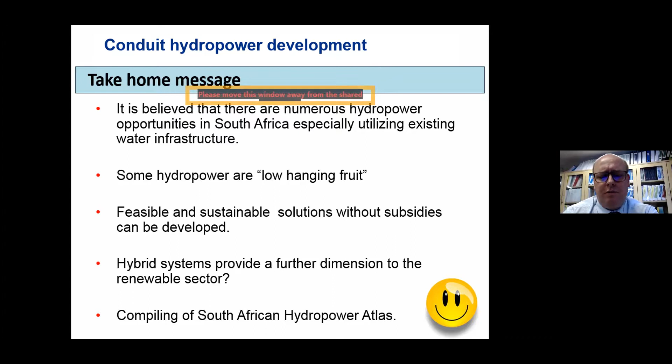So that is what I would like to share with you on conduit hydropower, and if there are any questions, I'll gladly answer them. But maybe Kulakani, if we can first get some input from the panelists, I'm going to stop sharing my screen.

You know, Prof, I still like calling you Prof Marco, so you have to survive with the title. Thank you so much for the presentation. I think it was very informative, and it should have achieved, and has achieved, the objectives you set out. We looked at the case studies, some of the theoretical outputs that inform the direction. So well done, and thank you so much for it.

We do have some questions from the chat room, but before we go to them, I would like to welcome Jay, one of our panelists. He had indicated he was going to be joining slightly late. He's from the Water Research Commission. So, Prof, there's a question from Dr Senamela, who was worried if there are any pressure losses caused by the system in the pipelines. Maybe you can touch on that quickly.

Okay, so regarding pressure losses: I'm not adding a hydropower installation to a pumping line, for instance, because that would mean I'm adding pressure and then taking it away again. So I'm installing it at locations where there is excess pressure I would like to get rid of, and I could do that somewhere along the line, not necessarily right at the end. I could do it halfway along the line if that's a better location. But I still need to ensure there's enough pressure downstream of my installation to get the water to the end reservoir, to overcome friction in the pipeline. I can't take all the pressure away. So pressure loss is not a problem, but I control how much pressure head I'm taking from the system. That's what I design the turbine to do: extract a certain amount of pressure from the system for a specific flow rate that I guide through it.